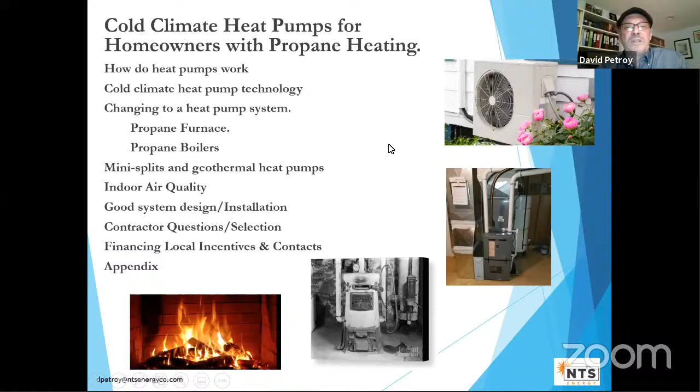So let's talk about what heat pumps are to start. There's two pictures here. Basically, a heat pump has two components: an outdoor unit that looks just like a conventional air conditioner, and then on the inside either an air handler, or sometimes you can put it in conjunction with a furnace. So that's where the blower is.

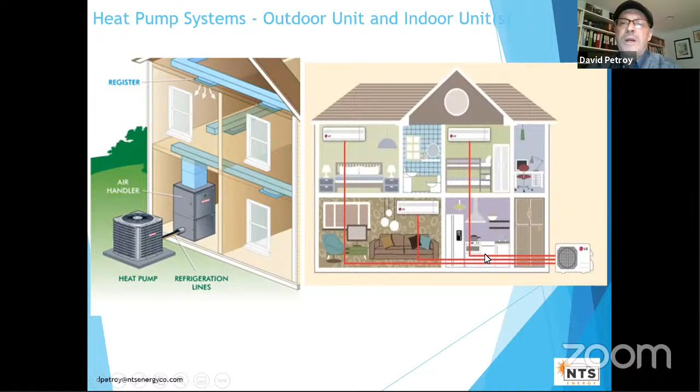This over here is called a mini split, or ductless air conditioner heat pump system. The unit outside basically has the same function, has a little different look to it, but then it connects to several units inside your house. Each of these units is connected by a pair of refrigerant lines, and over here too, I forgot to mention, a pair of refrigerant lines there.

So how does it work? Well, a heat pump - don't think of it as moving temperature. It basically extracts heat, concentrates it, and moves heat, not temperature. It's an air conditioner, it's just reversible. So let's just take a quick review of how this works.

In the appendix is a more detailed diagram. This is the unit - this is inside, so this would be your air handler or your blower or your furnace. This is the outside, all this is in that outside box. So let's start where the refrigerant - and a refrigerant is a chemical that loves to absorb heat.

If you put a refrigerant on a stove in a pan next to your boiling water, the refrigerant would boil almost instantly or very, very quickly. So it's coming out of our house in one of the two refrigerant lines, a little bit cool now because it's given up all its heat. It comes into what's called an expansion valve, and all that means is it's a place where there's more room. The refrigerant expands, and when a refrigerant expands, it cools down.

So what you want is the amount of expansion - you basically want to get it to be colder than the outside air. And believe it or not, refrigerants with these great properties of heating and cooling can expand and become chilled. So even if it's like 10 degrees out, this will be below zero. It will come in here, and heat moves from warm to cold.

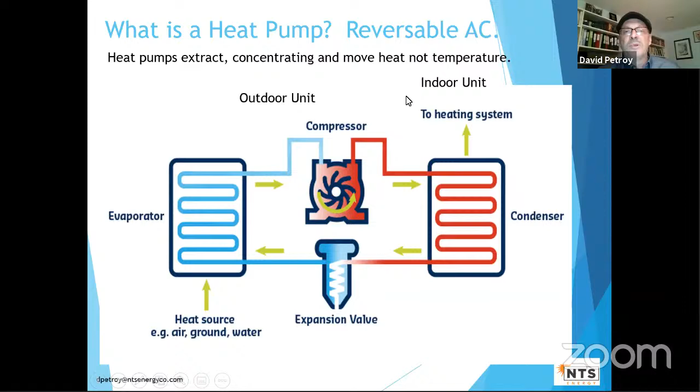Now, occasionally people in the northern climates would put a heat pump in and say, I'll use it for the warm times of the year. But the problem with that is the technology got a reputation. It doesn't work in Colorado. It doesn't work where it's cold. Well, it didn't work very well because it's not designed to do that.

In about 2005, a lot of people who work with heat pumps said there's really no reason that we can't work on heat pumps and make them work in all climate zones in North America. There's a few things we need to overcome, better technology, but fundamentally there's no reason not. And the other driver was a bit of a spike in fuel prices between 2008 and 2010. In New England, fuel's very expensive, more so than Colorado.

So they started to put in a lot of these heat pumps. And also some manufacturers from Japan started to bring over heat pumps. So thousands of heat pumps have been installed in New England and in northern Minnesota in the cold climate zones, like in the middle of our state. So it's a technology that's been out there and functioning great.

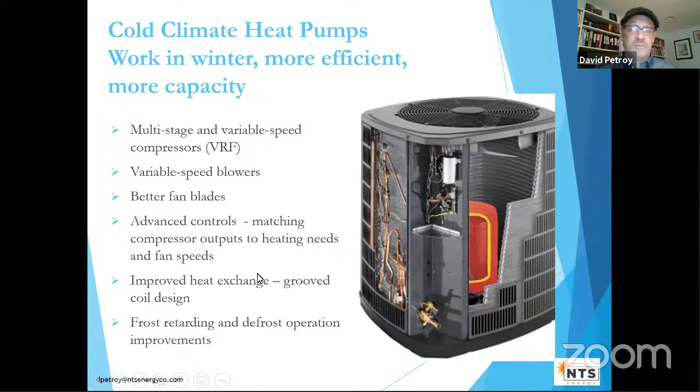An improved heat exchanger. So all this area over in here, the heat exchanger got better. And the most important thing probably is they worked on methodologies to deal with the defrosting, because if the thing frosted up, it's not going to work in cold climates. So before I get into some of the benefits of that, let's talk about some terms, because you're going to really need to know a few things here.

Tons is not this dude here. Tons is heating and cooling tons. It's a measure of how much heat you need to heat your home. And 1 ton is 12,000 BTUs per hour. Most homes are in the range of 3 to 6 tons, so 36,000 to 72,000 BTUs per hour. And that's how people design systems and size them correctly.

The other term you've probably heard a lot is SEER, which is a measure of cooling. Every air conditioner has it. It goes between 15 and 24. The higher the number, the better. The next thing, which is somewhat the mirror of SEER, and this is very important for heat pumps, is called HSPF, Heating Season Performance Factor. That says, how well will that heat pump heat your house? How effective during the winter? The higher the number, the better. And we'll talk more about that.

Coefficient of performance is another way to measure how efficient things are. Higher number, the better. And I'll talk a little bit more about that. Basically that can do heating or cooling. It sort of doesn't matter. It's a direct comparison.

Now, one thing you need to be aware of is a lot of people who have heat pumps say, oh, the air coming out of the ducts isn't warm. Well, it's not going to be warm like a furnace. Furnace temperatures coming out are warm. Heat pumps, as I said, are 95 to 105. So like when I was a kid growing up skating with numb feet, I wouldn't have wanted to put my toes in front of a heat pump vent. However, it feels just neutral.

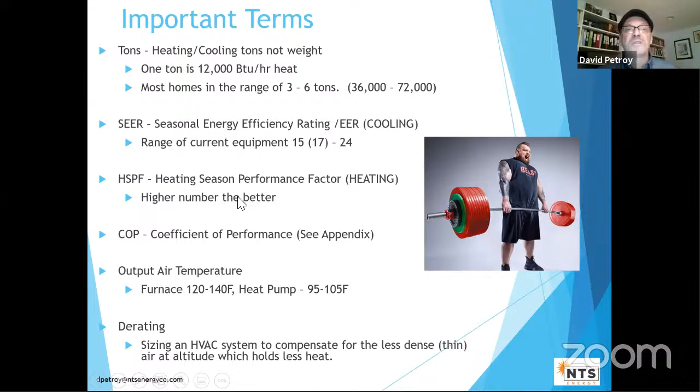And remember, we're only trying to heat a house to 72 degrees. So plenty of warmth, though it might not feel really warm when it comes out. And the last thing is called derating. And that's basically sizing a system to compensate for altitude. And that's really a unique thing to Colorado and our high elevations: you have to take that into account when sizing your system.

So all this work went into this class of heat pumps called cold climate heat pumps. Well, what did it do? On the left side is that measure of efficiency, and the axis goes from 0 to 14. And on the bottom is the time. And so this is 2012, about there. And the best unit you could get would be 8.2 HSPF.

And over the years, every year, 1 or 2 points. And now the best is 13 HSPF. Most cold climate heat pumps right now run between 10 and about 12. So there's tons of systems available on the market by all the manufacturers. Well, that improved the efficiency quite a bit. So 13 is 59% better than the old ones. 11 is 34% better. So that improvement alone is what made the economics of heating with cold climate heat pumps a lot more effective in our climates.

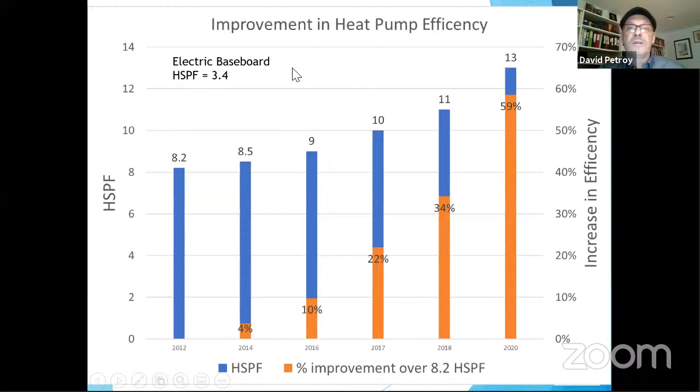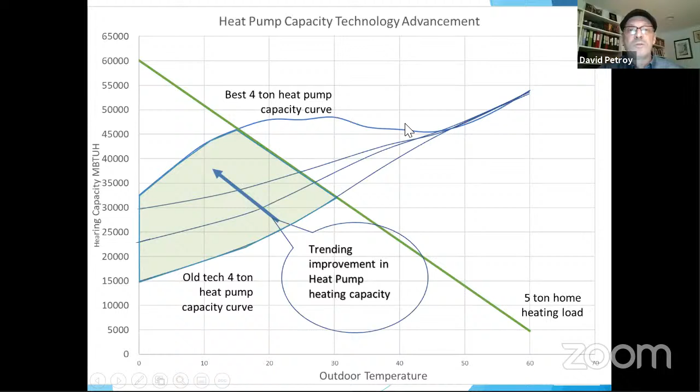Well, there's a little gap here, and that's usually compensated for with a little electrical in the back of the system. But we'll see in the next couple slides that actually, even though it's freezing and we think we use a lot of energy here, we really don't in our climate. Most of the energy used heating is in the middle of the cold climates.

So this is Colorado, a very unique situation. We have 4 climate zones. No other state in the US has 4 climate zones. Hardly any place in the world has 4 climate zones. And what you're going to think about is 2 climate regions. In the high altitudes in the mountains, it's zones 6 and 7. And even though climate-wise they're distinct, I'm going to talk about them as one, because when you're thinking about heat pumps in Colorado, they're really pretty much the same; the difference is more in the summer than in the winter.

And on the eastern plains in the Front Range, we have 4 and 5, and in the southwest corner, we have 5 also. Now, everything I talk about today with regards to energy savings and money savings is really focused on here. I use Eagle as a standard for this area, but it applies for those of you who live or work out there. It's just that the economics and the savings will be even better because these are slightly more favorable to heat pumps.

And this diagram shows what I was mentioning, how much energy we use at different times of the year in heating. The bottom is outdoor temperature, from -20 all the way up to 62. This is Eagle, Colorado, and this is the percent of the annual energy use at each of those temperatures. So most of the time, April through October, it's mild, it's out here. That's about 1/3 of the annual energy use. March through November, and some of the winter, is this big chunk in the middle, 49%.

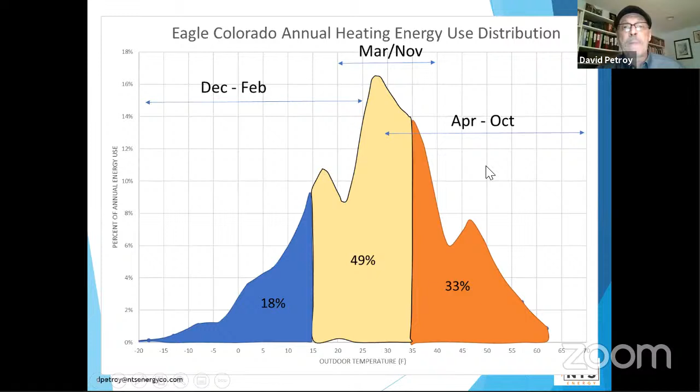So when we're talking about comparing propane to heat pump, there's really no magic to it. It really comes down to these efficiency measures, and it basically comes down to how much energy you get out of burning something versus just moving heat. And a furnace, oh, a little mistake. I said 98% furnace, COP 96, that'd be actually 0.98 instead of, or vice versa.

A cold climate heat pump is around a COP of 3. Remember, coefficient of performance, the higher the number, the better. So really, it says for every unit of energy in, I get basically 3 times as much out. If I divide it by 0.96, 3 times more efficient. So a heat pump uses roughly 68% less energy to heat your home than propane.

And at current electrical prices and propane prices, you're going to cut your heating bill by about 50%, plus or minus a little bit, switching, because per unit the propane is still, they're close in price, but slightly less. So it's huge savings right now.

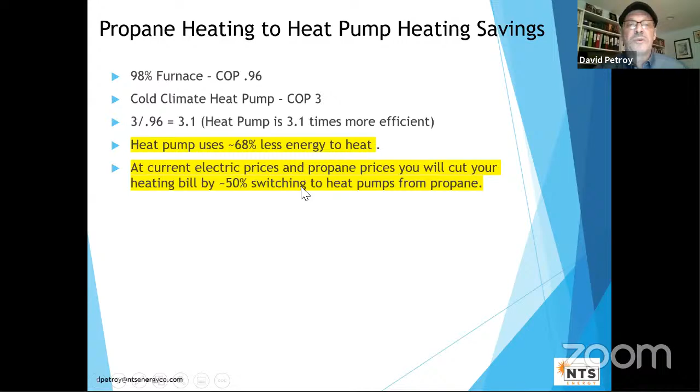And now we're going to get into your house and discuss, okay, what can you actually do? And so there's a couple configurations. This picture you saw at the beginning, and this is for propane furnace replacement. So we'll talk about, you can replace your furnace and put in a heat pump and an air handler. In some cases, you can do a heat pump with the propane furnace.

We're going to also talk about the situation where you have a propane boiler and radiant in-floor heating. And this is a picture of a heat pump system that creates hot water. This system basically sends hot water to a buffer tank, which is going to supply the hot water to your radiant floor. And typically it'll be in conjunction with either a propane boiler, or if you want to go all electric, this can be an electric boiler, because with a correct design, the heat pump's going to do most of the heating. The other option is you can do some mini splits to take some of the load off.

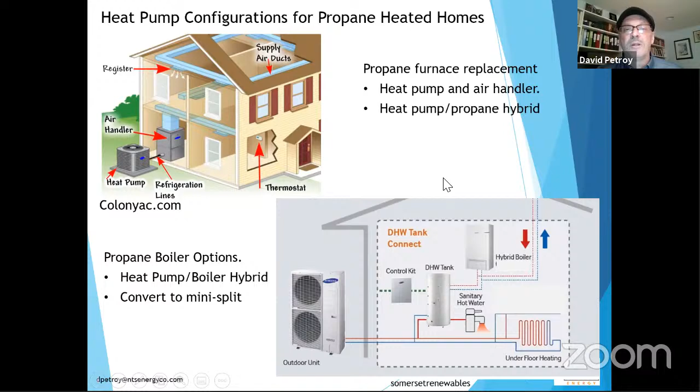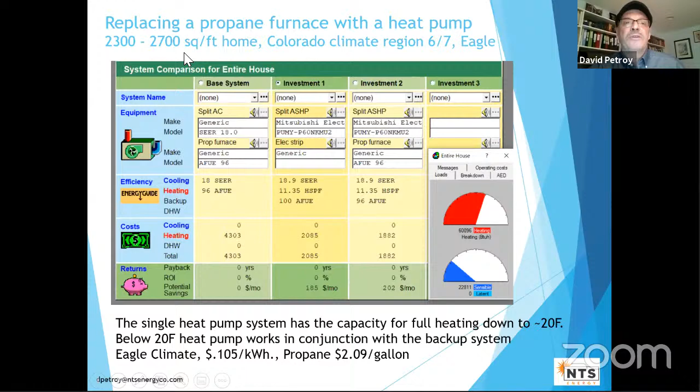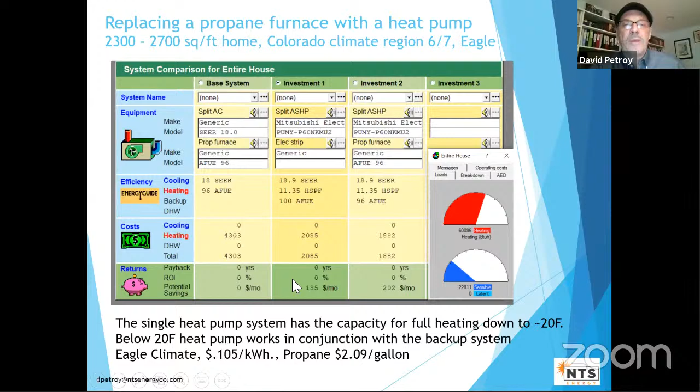Now I wanted to look at a slightly bigger home, this one is 2,300 to 2,700 square feet. Same thing, you run the model. Since it's a bigger home, I might need to use a little more of the backup heat, not a lot. Don't want to dwell on that, let's go to the real numbers here.

So the average heating costs, again no surprises, quite honestly. This is a bit more of a cost, a bit bigger systems, a bit more in rebates, and notice very nice paybacks in the difference we're talking about here. Then looking at annual heating costs, if you finance that, obviously a bit more to finance, but still, even for the first 7 years, you'd save a fair amount of money per year financing the system. And then for the rest of the system's life, you have great savings.

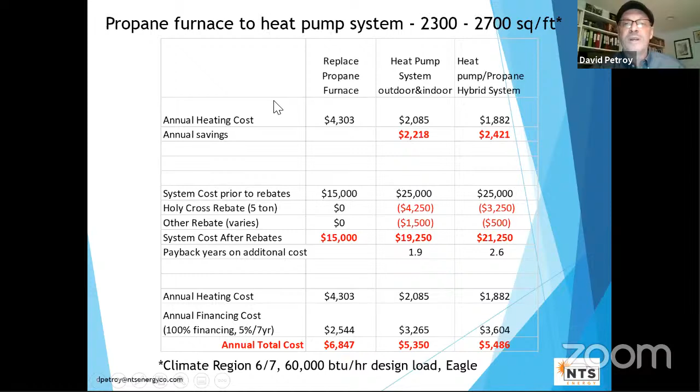So what about larger homes? Well, with larger homes you're going to have to look at a different strategy. You can decide you're going to need sort of two heat sources. If you want to do your whole home, you're basically going to need a couple of heat pump systems. So you can do it a couple of ways.

Think about your house — if it's 2 levels, you could do the top story with one system, maybe a mini split, which I'll talk about in a few slides, and then the duct system below with a smaller unit. That's a great way to do it. Or you could add a mini split for a great room downstairs and then a heat pump for the rest of the house.

So there are strategies there. Or you can just convert half your home to a heat pump — maybe the second floor is uncomfortable, maybe a wing or half the house isn't heating well, or you just want cooling there. You can do that, and the economics will still look like the little townhouse example I presented. The other option with bigger houses is to replace the furnace and go with a hybrid heat pump/propane furnace system, because furnaces do have a little more capability. So you have some really, really nice options with larger homes.

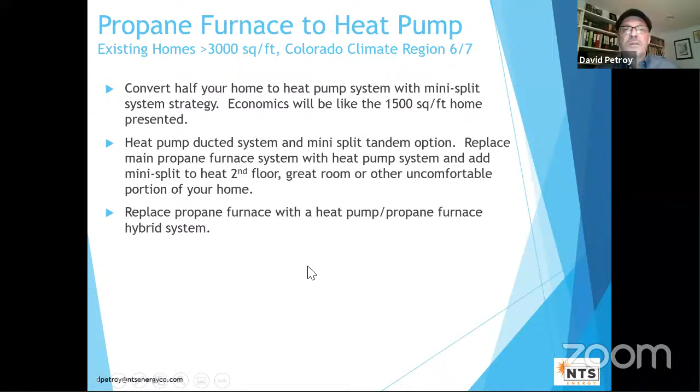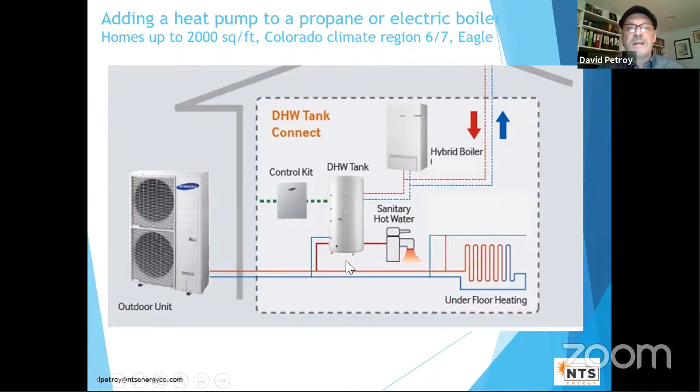Let's talk about propane or electric boiler systems, for homes up to 2,000 square feet. These units that produce hot water with heat pumps are great, though it's a little more difficult for them to do than just air. I've shown this before, so it's really simple: your plumber or installer will come in, add a buffer tank, route your boiler through it, and add in the heat pump — a very nice system.

But there are a few things you need to think about. First, it works with radiant in-slab or warm board heating, basically 120-degree water, because these heat pump systems can produce water around 110, with 120 being about the top. So if you have high-temperature baseboards, it's not really a system for you — though you can replace your baseboards with high-efficiency radiators, and that's an option. I'd really talk to my contractor and brainstorm whether that's a good strategy, or consider mini splits or other approaches.

It's not something you can do quickly — you can't call up a contractor and say 'my boiler failed, I want this hybrid system now.' You really need to plan ahead. If you have an old boiler, in the summertime or whenever things are slow, talk to contractors and get some quotes. For larger homes, you'll need to add more than one of those units.

But also, the other option is, if it's 3,000 square feet, you can consider a ground source heat pump.

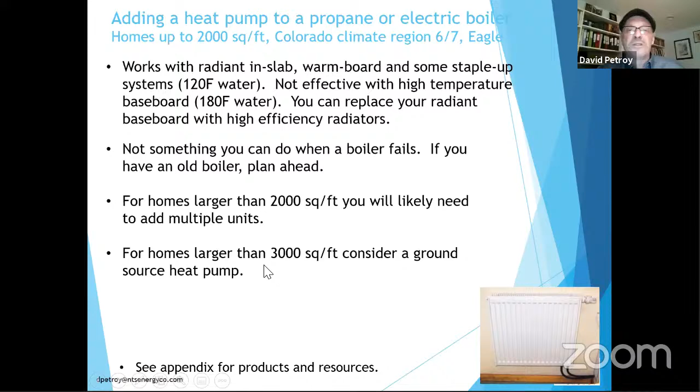So what would happen? Let's talk about a heat pump boiler in a townhouse, a small system. You're going to have nice savings, maybe not quite as much as with air, because it's a little harder for these heat pumps to work. With the rebates, the savings gives around a 4.5 to 5-year payback. If you finance it, you have a little bit of savings versus this, but over the long haul, it's great savings.

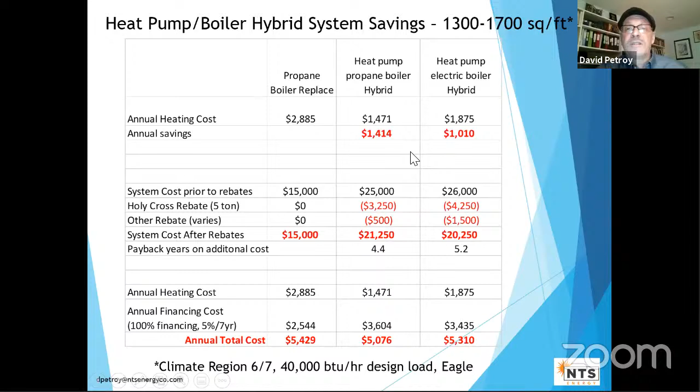So let's get into a brief touch on one of my favorite topics, ground source heat pumps. These are for in-floor radiant heating. Now, the way ground source heat pumps work, let's look at this diagram.

Basically, in the mountains, you'll drill boreholes, anywhere from 180 to 300 feet. You get the excitement of having a drilling rig outside your place - you can invite the local 3rd grade class, like I did when I did it at my house. These horizontal pond loops are more for the plains, maybe the eastern plains of Colorado. Inside, what's nice is the heat pump unit is actually inside. It's water with a glycol mix that comes in, and that's what carries the heat. So really, the heat's getting exchanged in the ground, which doesn't change temperature much during the winter.

So it's much more effective and efficient. It'll do the same thing - heat a water tank - and you might not need a boiler in this case because they have more capacity, not as dramatic changes with the winter. Or in a lot of cases, depending on how much you need, you might still have a boiler in there, especially if it's a newer boiler. It doesn't hurt to keep it.

And then you have underfloor heat. This can dramatically cut your bills by 65% or more because they have a very nice COP in the winter - coefficient of performance. Higher is better, because it's not trying to pull heat from very cold air, it's just trying to pull heat from a relatively warm ground. To give you an idea, the temperature down in here is the average temperature.

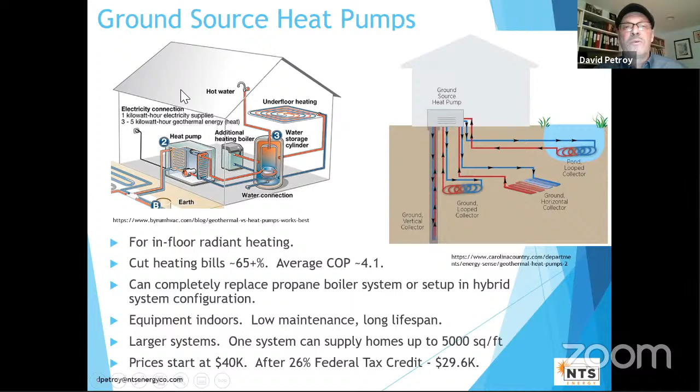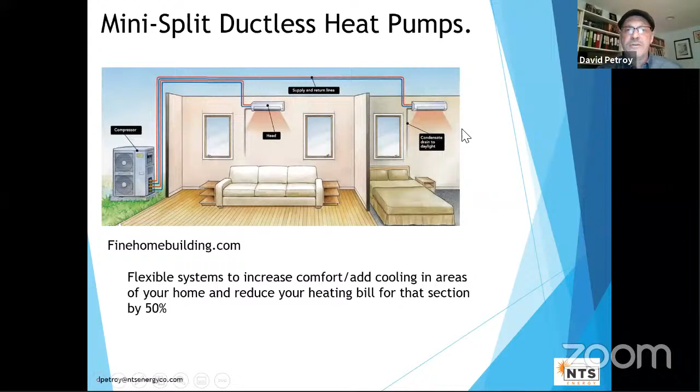I've mentioned mini split ductless systems. These are great, and this technology's been out about 10 years, and it's more widespread, very worldwide. They're really flexible systems because you can look at certain areas of your house, and for that section you can really reduce your bill. Here's another picture: outside unit, a couple inside units.

Let's look at what you can do now architecturally. They're very nice - beautiful options. These are the old style on the wall, which is fine, but now if you have an attic, you can put these cassettes up there. They have nice floor units. One I really like is a slim duct - it can fit up in the attic, so you just have ducts. This could also fit in the basement and turn up to do some of your first floor. There are really great options for this kind of stuff.

Floor warming still uses energy, but a lot less than heating your whole house. You run water at a floor warming temperature of mid 70s versus having to run it at 100, 110 for main floor uncomfortable wings. If you're doing additions, this is a great simple system to put in. You don't have to think about extending ducts or upsizing your main system.

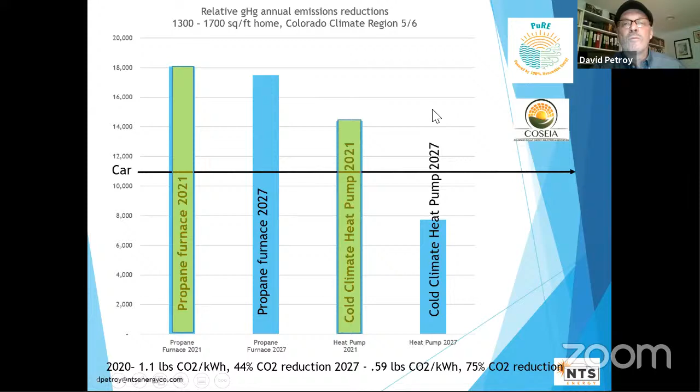At the same time you're thinking about this, I'd like to talk a bit about indoor air quality, because it goes hand in hand, and there's a lot of talk about it. We're getting shut in for fires and things, and warming up, so you really want to think about this, and there are really new and improved technologies to deal with it.

People are finding out more and more that stoves right in your kitchen are a direct source of indoor air pollution, and maybe not the best thing to be breathing all the time. The cool thing is there are induction stoves and new electric stoves. I just got an electric stove, and the time to heat stuff up is really fast.

If you've already got an old furnace, you really want to look at it, make sure it's been installed properly, because venting could be a problem. Since we're talking about heat pumps, it could be time to think about one. The cool thing now is when your water heating needs replaced, you can do an electric heat pump water heater, and that's a nice system that can cut your water heating bill compared to propane.

And I know everybody loves wood fireplaces. If you don't have one and want one, or yours is getting old, pellets are great and they're widely available. In the Rocky Mountains, they're sourced throughout the region, and a lot of technology has been put into how well and effective these pellet fireplaces are.

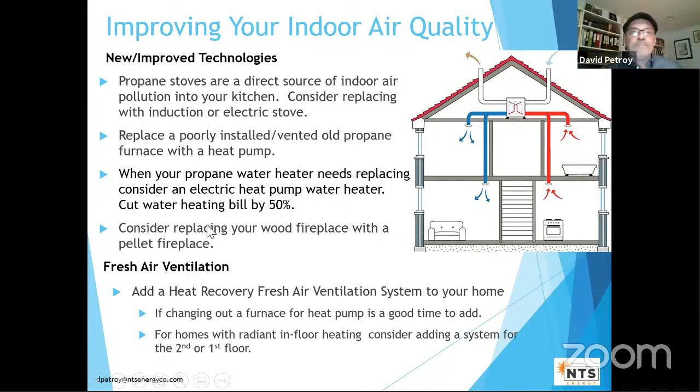Excuse me, let me get a couple—I need a water break here a second.

Let's talk a little bit about how you're going to know you're going to get a great system. Manual J is the magic word, and that's what people use. They build, model your home in the computer, and they can calibrate it to how much you're actually paying and using. And they'll pick the climate.

Here's Eagle. Minus 6 is the design 99.6% of the time. You could say, well, gosh, it has to go to minus 16. Yeah, but you don't want to over design. Notice all the way to minus 6, there's only on the average about 14 hours below that. So it doesn't mean you're not going to get a system to do that heating, but you don't want to overdo things.

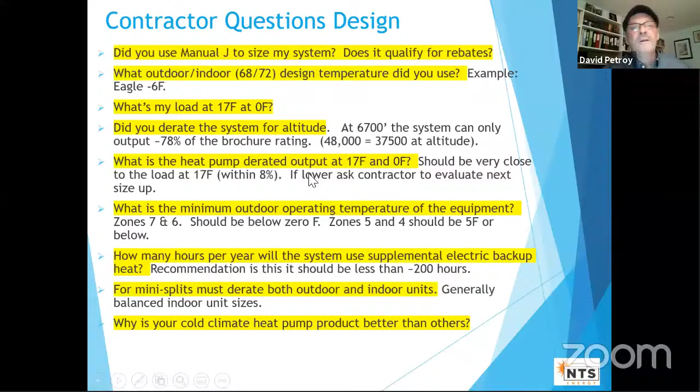So if you're replacing a furnace with a heat pump system, make sure they size it as large as possible, but you might have a little trouble with the ducts because the ducts might not be quite big enough. So that's the trade-off.

No worries, but it's time to make it better, more efficient, better flow, the thermostat. And this is important. If you're going to go to all this work and have a new system, make sure the rooms that were uncomfortable become comfortable. It's easy to zone a first floor into a couple wings. You can seal and insulate. And if it's a second floor, say, what about a mini split?

So up in the high country, a few things. The noise levels, they've really improved, and the indoor units are whisper quiet. I mean, I've slept in bedrooms and you can't really even hear them. The outdoor units, they're getting better and better. It's like a quiet air conditioner, maybe a little bit quieter.

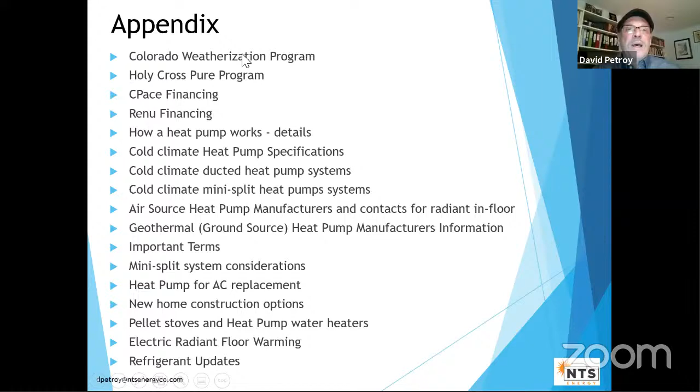Dave, is there anything else that you want to summarize for us? We have about 9 minutes left. Not a lot of questions on this one, but with the time left, this is an appendix which has a lot of information. If I want to emphasize something, I think, well, let's go back to the summary.

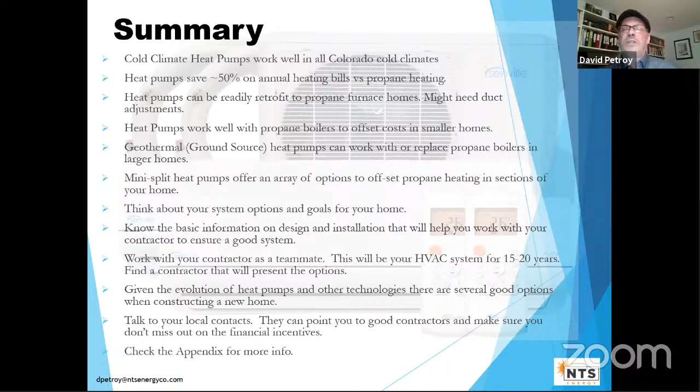So the summary: they work really well. Retrofitting or replacing furnaces is a very straightforward, easy thing to do. Just make sure the sizing is right. Same with the boilers. I would encourage people to consider mini splits. You might say, well, my furnace is pretty new, it's doing a great job, but my heating bill's kind of high and I'm getting tired of playing with it. You can take the second floor easily and put a few mini splits up in here. And all of a sudden, half your house is now on heat pumps. So that's a really good way to go about it.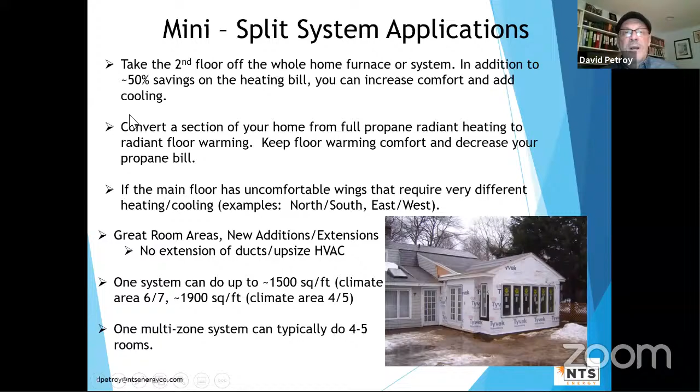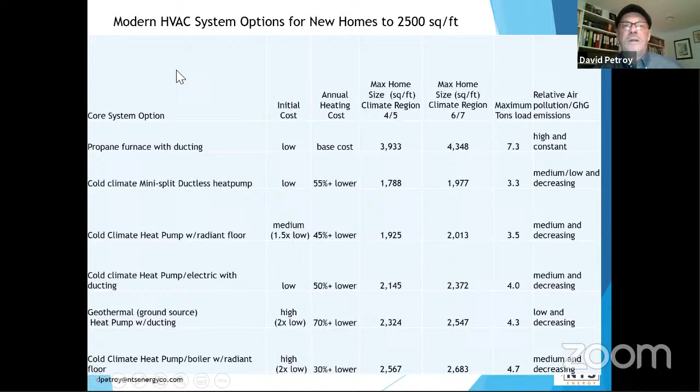If you or your friends are considering a new home, I would just urge you to start looking at these. Hopefully we're going to have something to talk about it, but start to look at these. At least you can start asking questions. And all the local resources, I'm also available, my email's down on the bottom here. If you're doing a new home and say, hey Dave, I just need a quick thought or opinion, happy to do that, because it's very exciting. You've got a lot of good options.

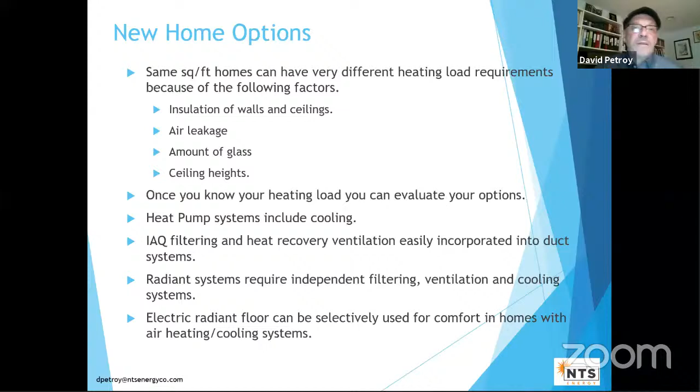The other thing I should say is we did one for electric homes last week, and all of this applies to electric homes even better, even more savings. It's about 10% better, as a matter of fact. And the next two are going to be for natural gas. Anyone who has natural gas and is interested, in the next couple of weeks we've got a couple of those to talk about how things compare to natural gas.

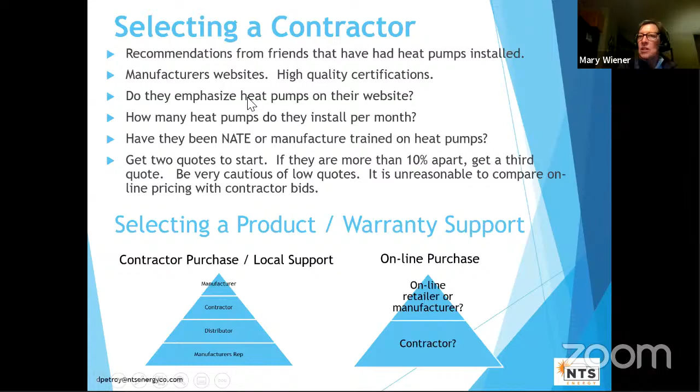So I haven't had anybody, like I say, if you don't install them right, you are going to have some problems and not be happy. So with a good installation and a good contractor, I think you're going to be very happy with them.

Great. Any last minute questions anybody has? We can just wait another minute just to see if anyone's going to type anything in. I don't want to cut you off, so we'll wait just another minute or so.